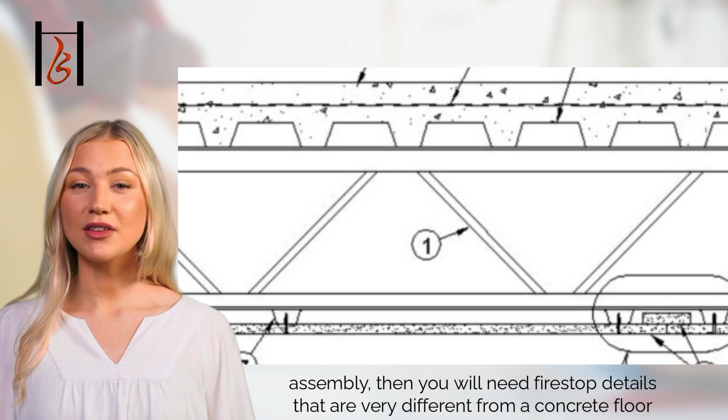If you're on one of these projects and you look up and see metal trusses, or at the top of the metal-framed walls you see rippers of drywall, those are two red flags that you should take a look at your plans, specifically the area that shows the floor assembly, before you start throwing Firestop sealant in any holes. If your plans look like the image to the right that's pulled from UL's G572 assembly, then you will need Firestop details that are very different from a concrete floor and more similar to the ones used in wood-framed construction.

Here's what the assembly will actually look like. You have a concrete floor poured over a metal deck. You have steel trusses, and under the trusses is hat track used to fasten the Type C drywall that will make up the ceiling. I see people doing a million things wrong on this construction type, but this discussion is for plumbing engineers, so we'll stick to this scope.

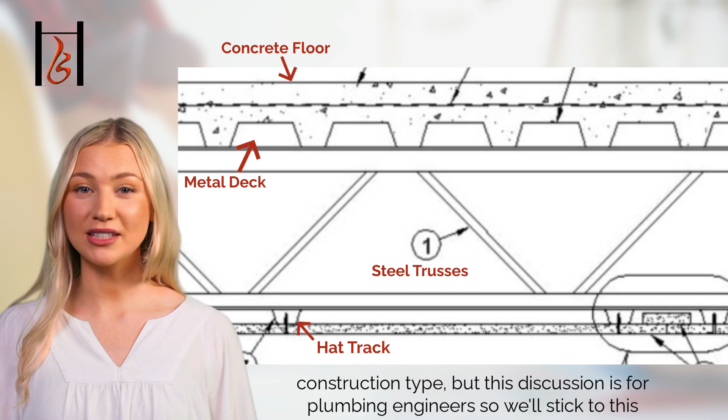But for now, let's stick to the plumbing scope. Here are a few things people tend to overlook. 2.5 inches of concrete alone is not going to give you a fire rating. Steel loses 50% of its structural capacity around 1,000 degrees Fahrenheit. The gypsum board on the underside that becomes the ceiling is a critical element of the fire protection of the entire floor ceiling assembly. That means proper construction of the ceiling is important, and so is proper fire stopping of the penetrations.

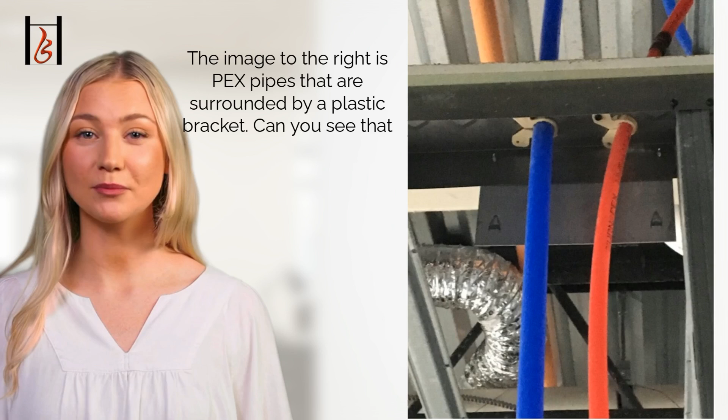Similar to wood-framed construction, the plumbing penetrations that go through this assembly will go through the floor, the ceiling, or both. Obviously, Firestop will be required when the penetration goes through either the floor or the ceiling, or both. The image to the right is PEX pipes that are surrounded by a plastic bracket. Can you see that the top track of the wall is metal framing? The PEX pipe runs through the metal framing.

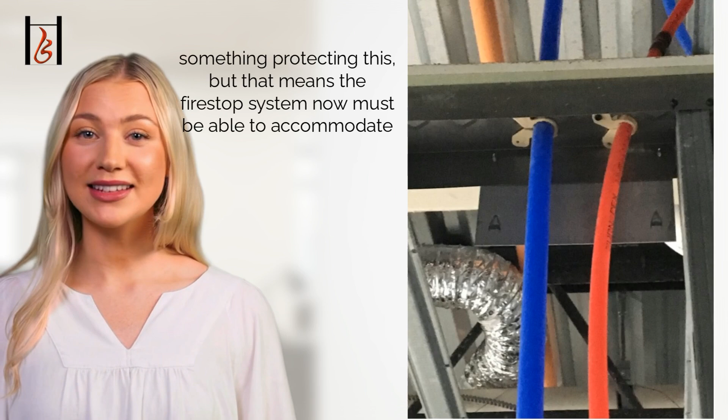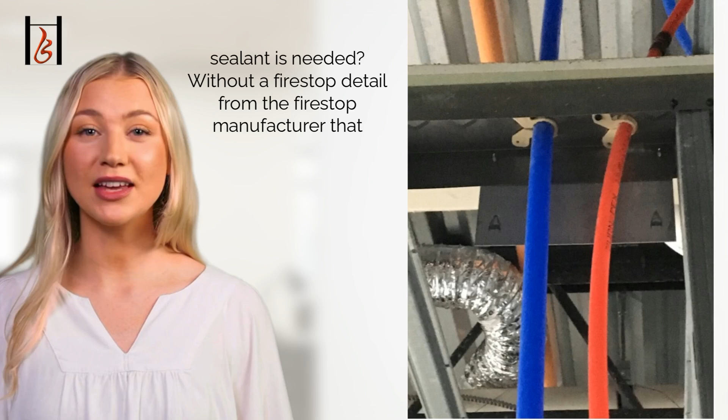There is a risk of movement causing abrasion, which may cause a leak, so the installers need to have something protecting this. But that means the Firestop system now must be able to accommodate both the PEX pipe as well as the bracket. Do you know what annular space is allowed or how much sealant is needed? Without a Firestop detail from the Firestop manufacturer that provides guidance, you don't really know what you should do.

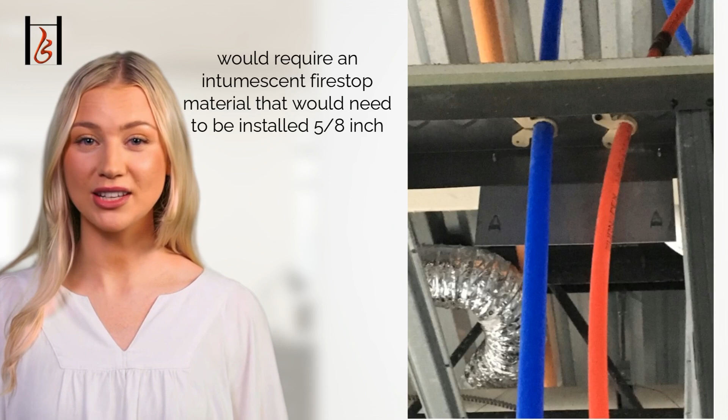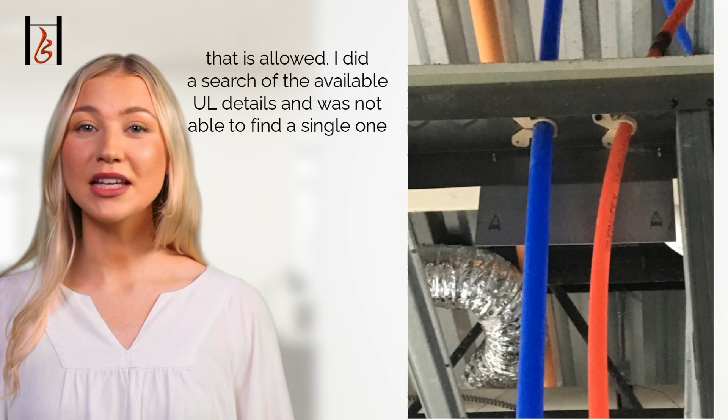I can tell you that this application would require an intumescent Firestop material that would need to be installed 5/8 inch, because that is the depth allowed by the 5/8 inch drywall. What I can't tell you is the annular space that is allowed. I did a search of the available UL details and was not able to find a single one that allowed both the PEX pipe and the plastic grommet, so the challenge becomes this.

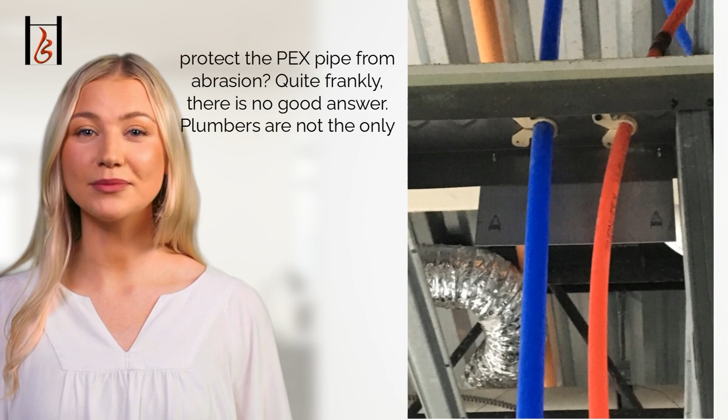What is an installer supposed to do if they want to properly firestop this application and protect the PEX pipe from abrasion? Quite frankly, there is no good answer. Plumbers are not the only ones with this issue. Electricians have similar challenges.

These G500 assemblies and wood-framed construction have several similarities when it comes to firestop requirements. They both have a floor surface and a ceiling surface, both of which need to have firestop installed on any through penetration. Both also have a ceiling assembly, and keeping fire out of the space in between is critical to the structural integrity and fire performance of these assemblies.

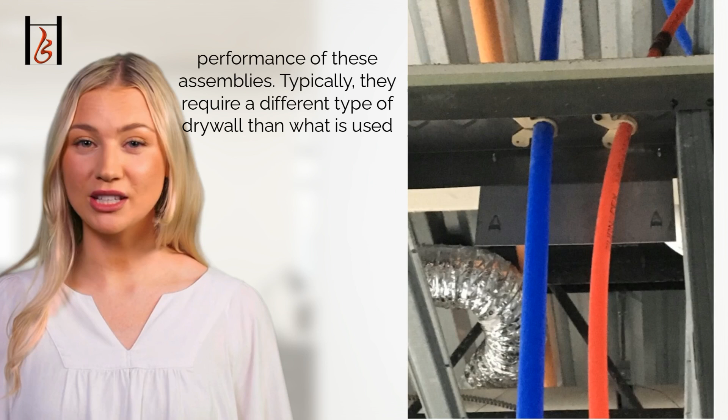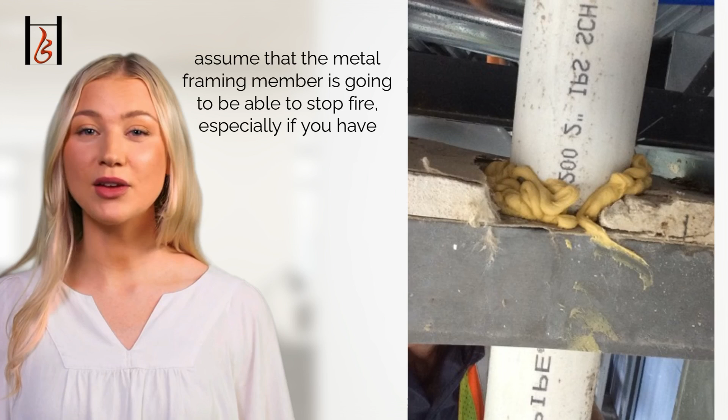Typically, they require a different type of drywall than what is used in wall assemblies, but you folks are plumbing engineers, not drywall installers, so we won't dive into that here. I only mention it so you know the two materials are not the same, but back to the plumbing scope. If you see something like this, where the drywall is all broken up, do not assume that the metal framing member is going to be able to stop fire, especially if you have something like this shown to the right.

Remember, our lazy firestop needs as much direction as you can give it, which means the drywall needs to be perpendicular to the plastic pipe. If the drywall is not intact or the plastic pipe is at an angle other than 90 degrees to the cut edge of the drywall, you are going to have a problem that is unique to plastic pipes. The lazy, intumescent, or expanding material will expand into the area of least resistance.

If there is a sharp 90-degree edge, like a well-cut drywall or a concrete or wood assembly, then the sharp edge will provide the direction. If the opening is hatcheted or the pipe is at an angle, the expanding material will almost slide off the plastic pipe and out of the opening. This means it will not be able to close down the opening the way the system is designed.

It also often means your annular space is too big, and if you remember from our Goldilocks story, that is a problem. From time to time, you might bring this up to someone who will give you some pushback. So I want to show you where to find the official documentation on which you can hang your hat. On UL's website are tons of free resources. You will have to register, but you don't have to pay to get access. At this link, you will see the XHEZ document. If you deal with firestop a lot, you might want to read through the whole thing.

It's a great resource. When you read through it, you will find a section that says, where the uninsulated penetrating item in the individual design is indicated as a metallic pipe, conduit, tube, duct, or cable, and the firestop system consists at minimum of a fill material, such as sealants, putty, or mortar, the penetrant may pass through the opening in the wall or floor assembly at any angle, provided the annular space is maintained on both sides of the wall or floor assembly, and all other specifications in the design are satisfied.

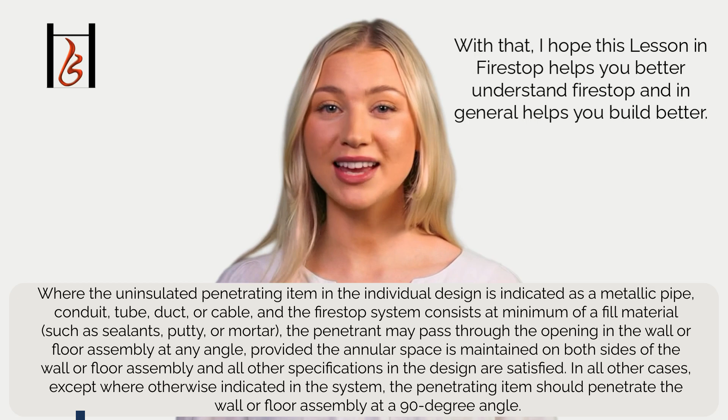In all other cases, except where otherwise indicated in the system, the penetrating item should penetrate the wall or floor assembly at a 90-degree angle. Keep in mind, this is referencing metal pipes with no insulation. If your application involves insulation or plastic pipes, the fire dynamics are different. With that, I hope this lesson in firestop helps you better understand firestop and, in general, helps you build better.